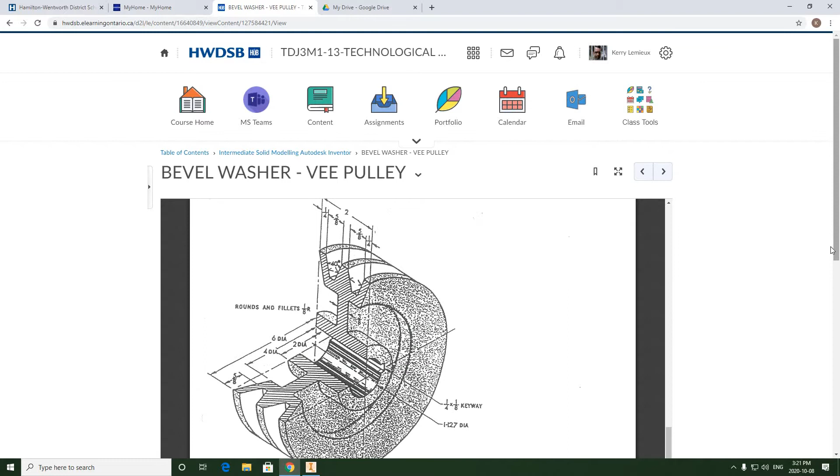So to find the VEE pulley, we need to come down past the bevel washer and we'll find it right here. Now, when we take a look at this, it's a little more complicated than what we've seen, and we can't build it with actual extrusions.

What we need to do is actually use a new feature called REVOLVE, where we're going to create a center line on X, and we're going to be creating a 2D sketch profile of this shape right here with the diagonal lines. After that sketch is constrained, we're going to create a revolve feature, spinning it 360 degrees along the center line axis, and we'll create the wheel.

I also want to mention that these speckles that you see here represent cast texture. So this wheel was most likely cast in a manufacturing process, meaning it was poured into a molten mold, and nothing cast is perfect. So basically, where a cast surface meets another cast surface, that edge can't be perfect.

It has to be curved. It has to be radiused. So that's what this is talking about here. Rounds and fillets are 1/8 R, so wherever a cast surface meets another cast surface, that edge is slightly rounded.

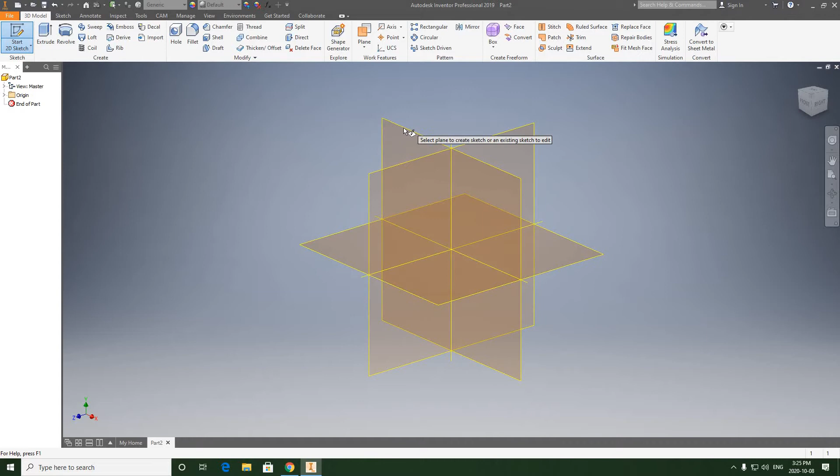We're going to 2D Sketch, and we're making sure that we're selecting the XY plane again. Last time we used the XZ, but I'm back to XY today because this is going to give me a front view start. So to begin, we're going to select line.

We're going to find 0, 0 and draw a line horizontally. It doesn't matter how long this line is. We're not going to constrain its length. So I'm going to right click, left click OK to escape from the line tool. So this line here, we're going to select it and we're going to go up to format and we're going to find center line.

We're going to select center line and that's going to modify that line to be a center line. Now this is very important because if we don't do this, we're not going to be able to revolve the sketch and we're going to have to work harder at also dimensioning it, which also means we're constraining it.

So we're going to hit line, and when we start drawing this, find 0, 0, but don't click. So just raise your mouse up on Y and keep X on 0. And we're going to travel up into about the 600s here. Then we're going to click. Let's zoom out a bit. So now we're going to continue vertically.

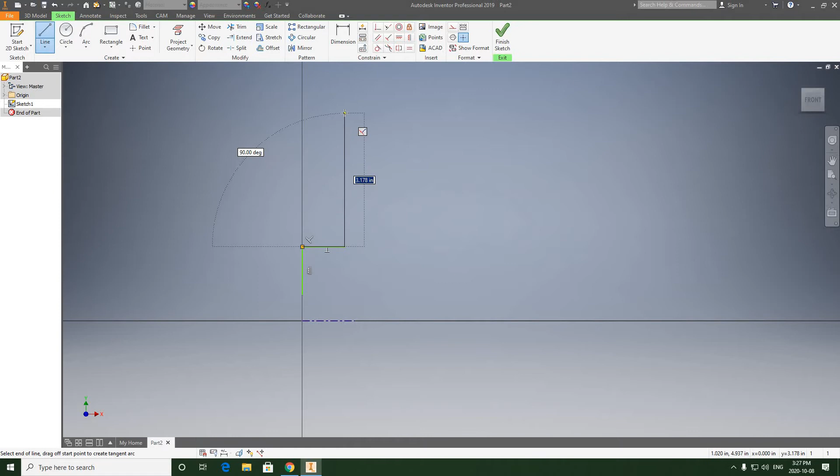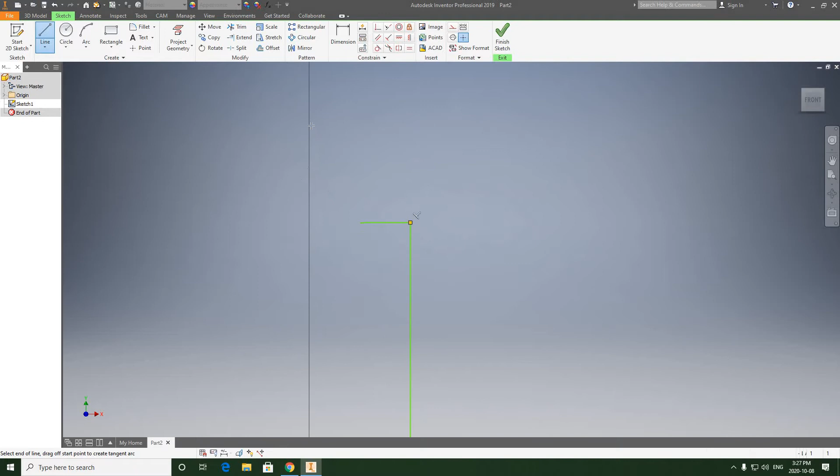And we're going to start to sketch this profile. So this is going to come over horizontally. We're going to come up on an angle. Now, notice when I swing this angular line, when I hit the y-axis, I get this little box that pops up. So that's when I want to click, because I want the top edge of this angular line to be exactly in line with the vertical line on the left side of the hub. So when you see this, click.

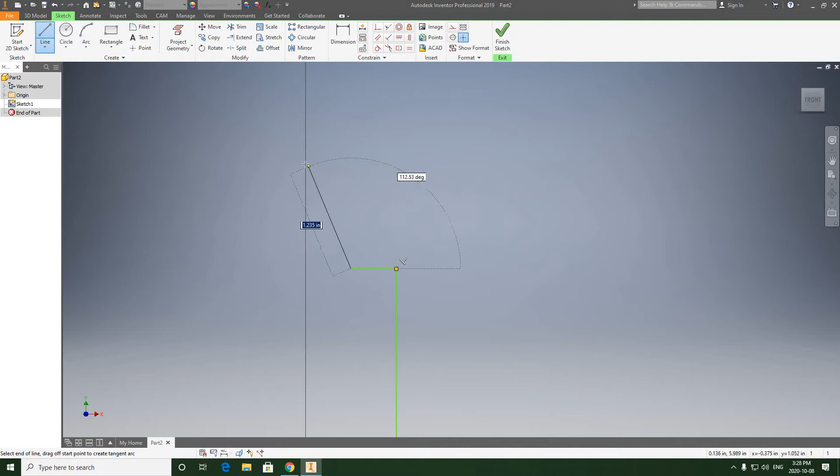And what is that? That is collinear, right? It happens automatically. You don't need to select it from up here. So when I see that, I'm going to left click. And then I'm going to come horizontally in about the 200 range here, 0.200s. Click. Now, watch what happens when I swing this line. This parallel symbol pops up now and again.

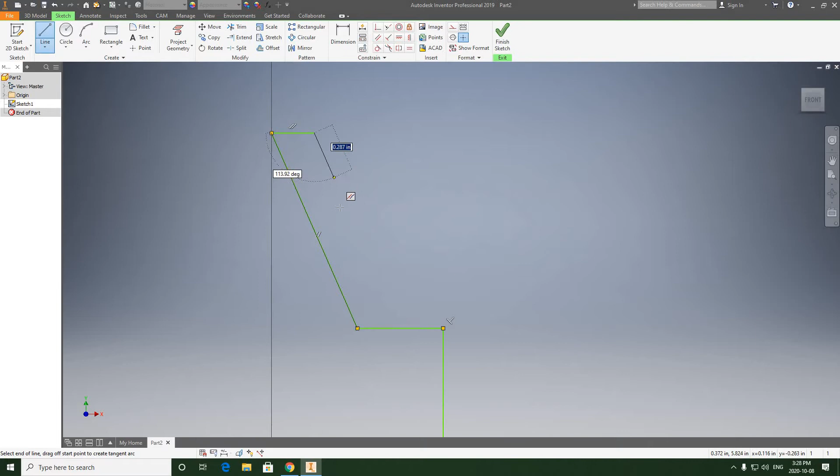And this is important. Even though we're not sketching this to be perfect, we're going to try to take some care in its initial creation. So this line I'm drawing right now needs to be parallel with this angular line I drew. So when you see that parallel symbol pop up, click. And you can see the double parallel symbols here and here, so we know that it's the same. We're going to continue on horizontally, and we're going to be in about the 500 range here, 0.500s.

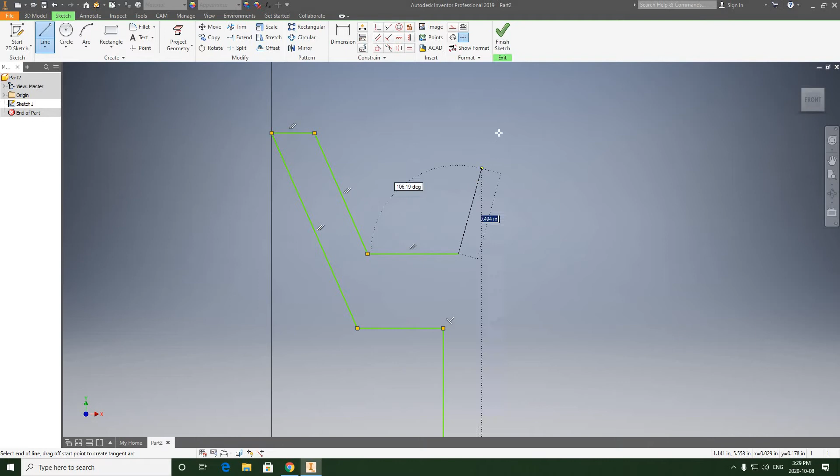We're going to click, come up, and I'm going to pull this line up until that black horizontal line appears, right? Again, that's another collinear constraint. We're adding them as we go. So this is going to make dimensioning easier if we try to make things the same height and make things parallel. So we're going to click. We're going to continue on in the 200s.

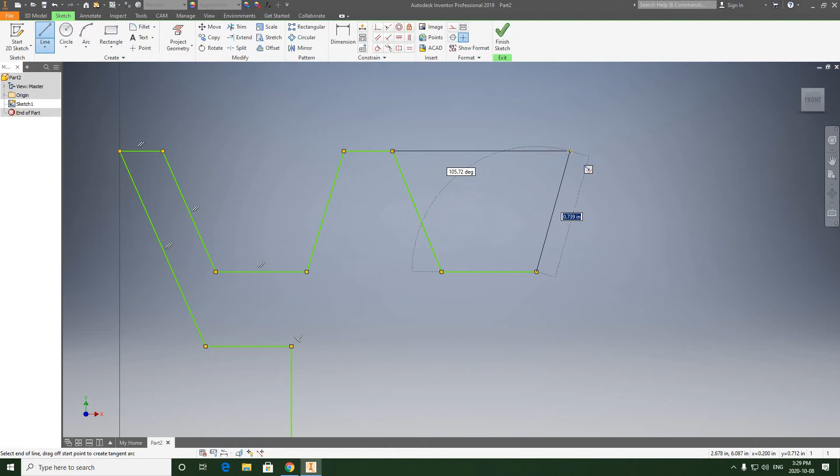We're going to come down and we're going to touch here with our mouse but not click. And we're going to make that collinear. Click. Keep traveling in the 500s. We're going to come up, make this collinear again like we did over here, when you see that black line appear. Come over into the 200s. And again, we're coming down on an angle and we're making this parallel.

I also want to touch here but not click and blend that parallel with that end point to be perpendicular. Right? I'm not clicking that, but I'm just showing you what it is. So we need to get used to using some constraints, but the good news is we don't actually have to pick them. We can just make them happen as we sketch.

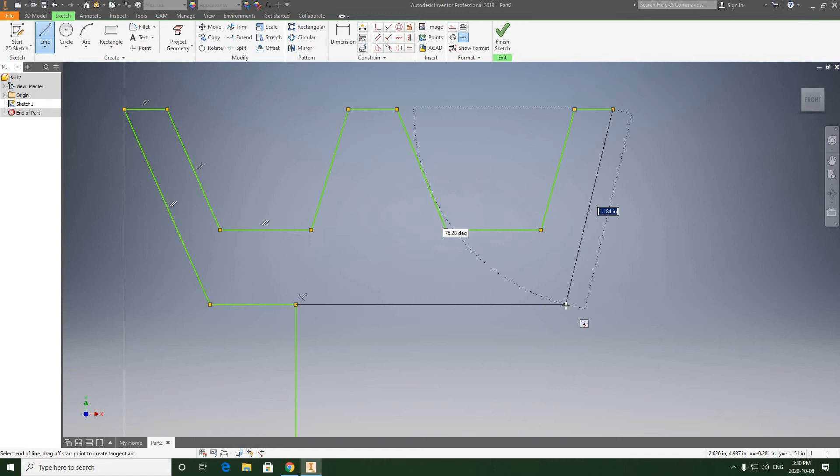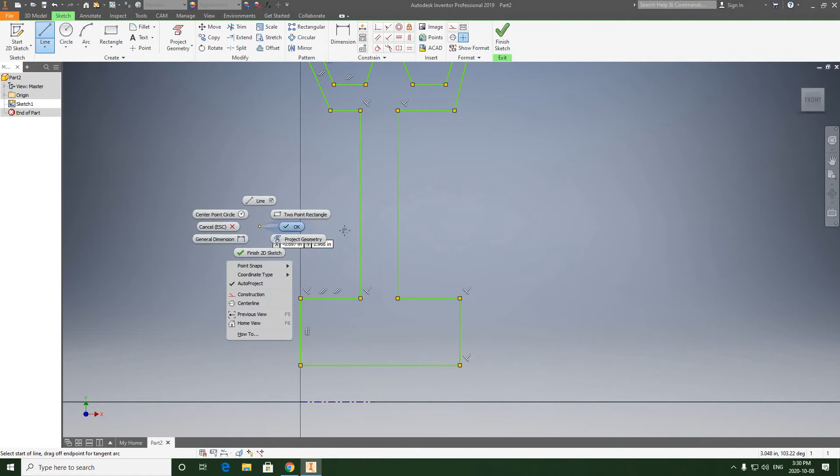We're going to come like this, and we're going to come down. Make that collinear, as you can see. Come out, come down, and then come back to here, where we started. Okay, so we've got our sketch. Now, it's not the most beautiful sketch in the world, as you know, but I did take some care in its creation.

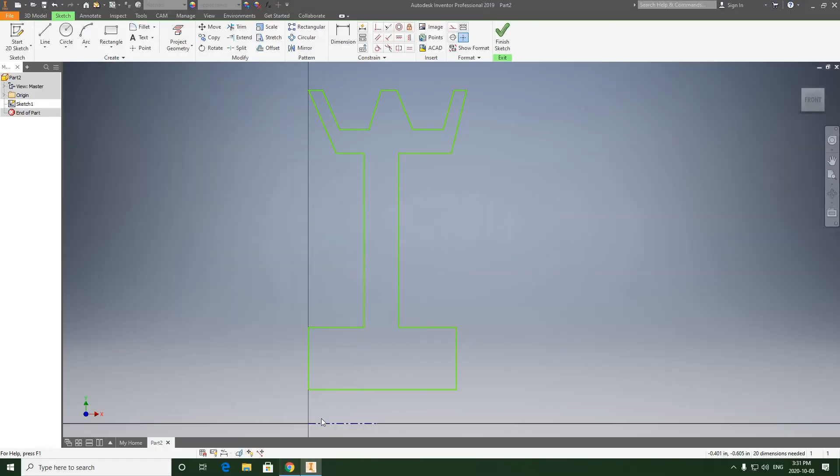And a couple of things that are important here is that the top left-hand corner is completely in line with the left side of the hub. And it's going to be the same on this side, and if it's not, it will be by the time we're finished. If I click into this, you can see that there's a center line running here and here. So that center line is showing that the left face of that hub and the top corner of the V pulley is aligned.

So that's how we know. So again, the width of the hub is also going to be 2 inches, right? Because from the very top, the width is shown as 2 inches from here to here, and the center line aligns the hub, so we know that the hub length is 2 inches as well. So we're going to click back into this.

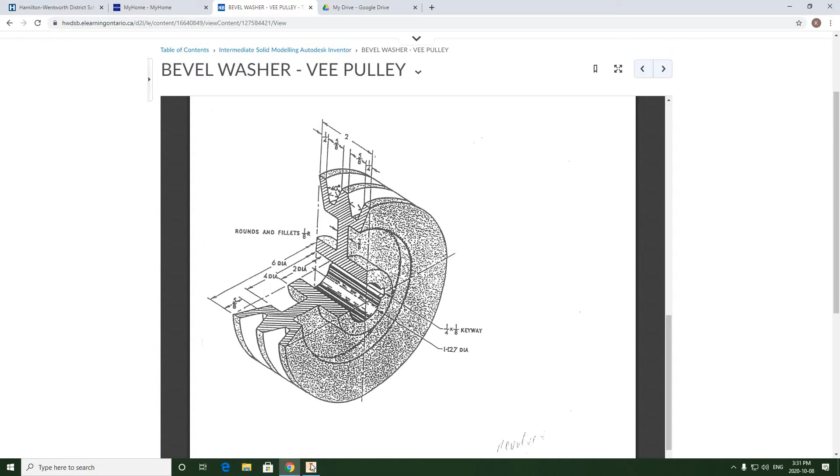Now, before we start constraining anything with our dimensions, it's very important that we lock, or I should say fix, this vertical line to the y-axis. Now, because this is not connected to 0, 0, I started the sketch offset, and the reason I did this is because I want to allow room or space for the bored hole that goes here.

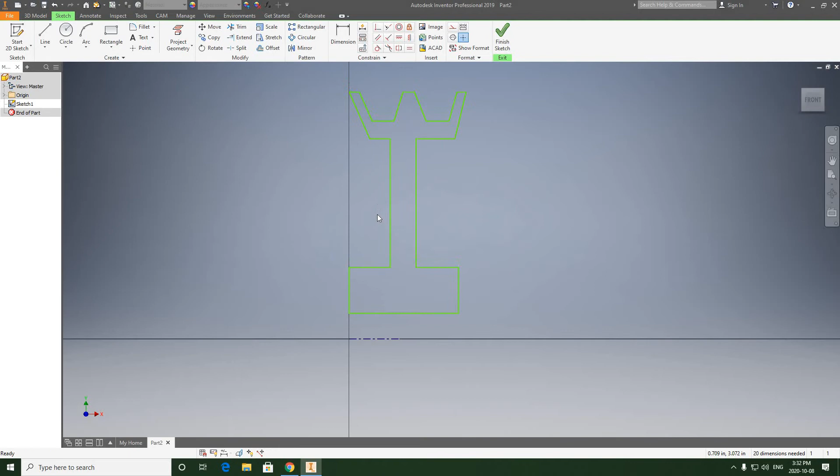So if I start dimensioning this, it's going to be very confusing because it's never going to go purple. I'm never going to get any indication of what I'm constraining and what's not constraining, and that's going to be frustrating. It would be frustrating for me as someone who's experienced, and way more frustrating for you who's learning. So what we have to do is add a manual constraint.

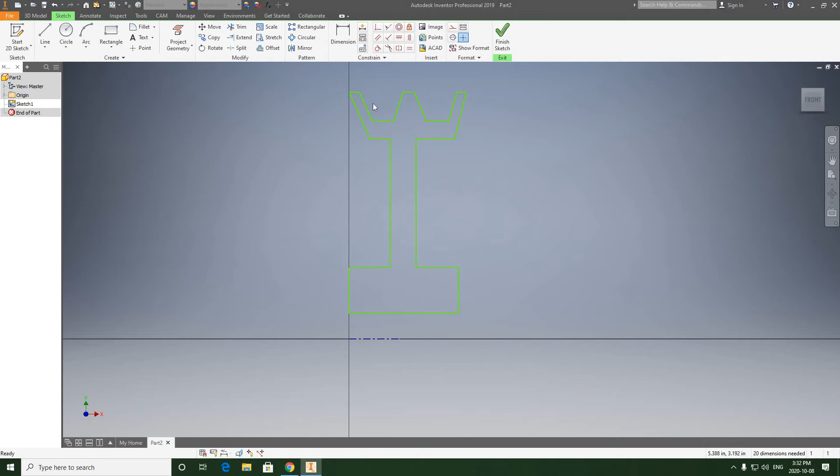We're coming up to constrain, and we're going to select fix, which looks like the padlock. We're going to pick it, and we're just going to select that left line. It's going to show that it's locked. Right? Any sketch connected to 0, 0 will naturally turn purple as it's constrained. The center line is the only thing connected to 0, 0, and whatever is connected on X or Y is always purple no matter what, even though we don't care about the length of it. So you'll see as we go what I mean. So that's now going to constrain as we start to dimension this sketch.

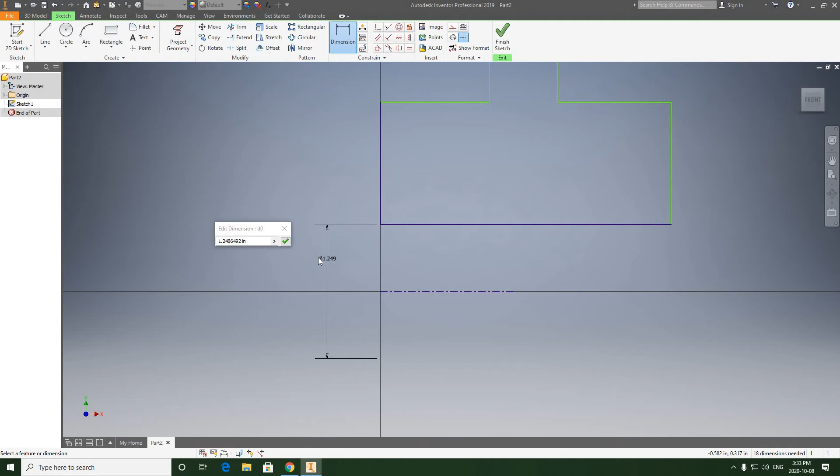So we're going to start with a general dimension. We're going to select the center line and the top of the bored hole, and we're going to pull a dimension out. Now, what do you notice about this dimension? It automatically gives you a diameter symbol, so it knows that it's supposed to be cylindrical, and it dimensions the extension line to the top of the bored hole, and it also dimensions the opposite side to nothing, because the center line is compensating.

So I don't need to divide, because I'm only sketching half of this. I don't need to sketch the other half. The dimensions know, as long as I touch the center line, it's going to run them as their whole size. So I don't need to actually divide them all by 2. Which is pretty handy. So this is 1.127, check mark.

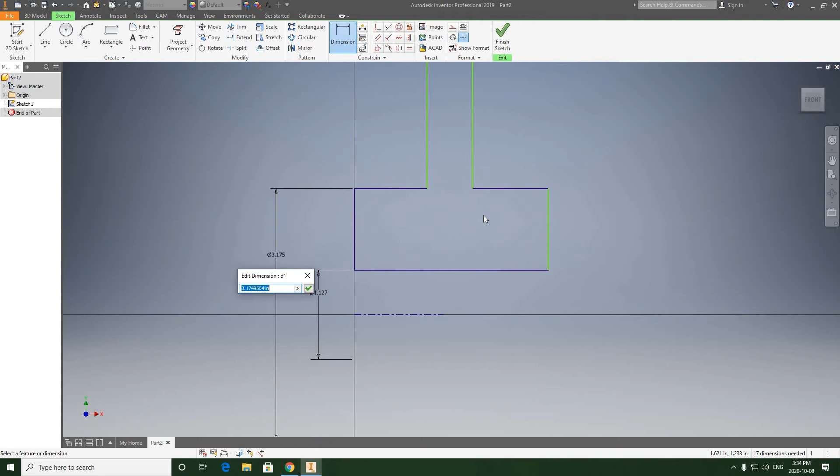Okay, so the next one, from here to here, center line to the top of the hub diameter. And notice how when you draw things collinear, there's less work. I don't need to run the dimension over here to do this side. It knows they're supposed to be the same. That's why you use the collinear constraint as you're drawing this. So this is 4. Check mark.

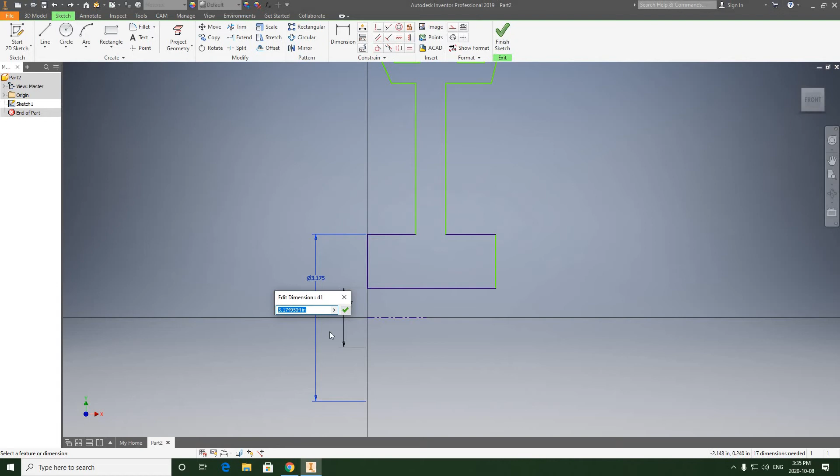Now we're going to work on the length of the hub. We're going to dimension from here to here, and we're going to make this 2, which will solve. Well, you know what? I made a mistake here. I'm sorry. I'm just going to back myself up here. This is supposed to be 2. I apologize. 2. Okay, now this is looking better. From here to here is 2 as well. All right. So the hub is fully constrained.

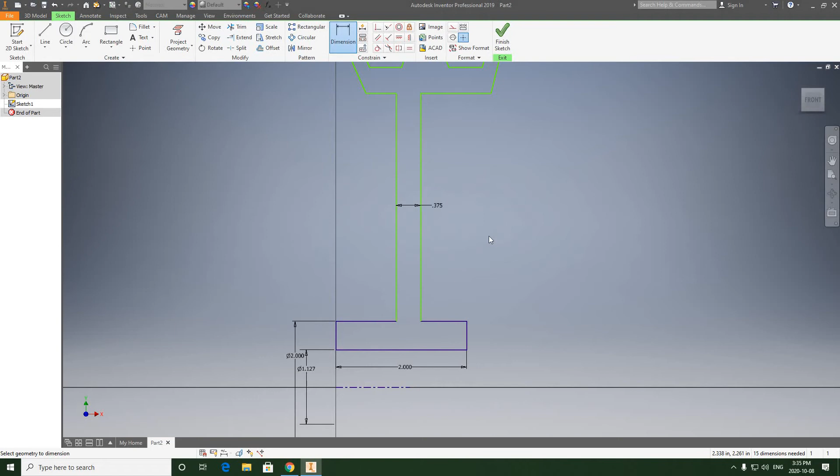Now we're going to work on the stem. It's listed as 3/8. Now, how are we going to center this into the hub? Right? This has to be dead middle. So we're going to run a dimension from the left face of the hub to the left side of the stem. And this is going to constrain it fully, but how do we figure it out?

We know that the width of the hub is 2, so we're going to input a BEDMAS formula into Inventor. So Inventor can do equations, right? Now BEDMAS isn't anything too advanced. It's something that you should all know how to do from intermediate school, I would think. I'm pretty sure they cover this in math, even now as review. So we go Shift 9, we'll start a bracket. We're going to type 2 as our width, and we're going to subtract this stem width, which is 3/8.

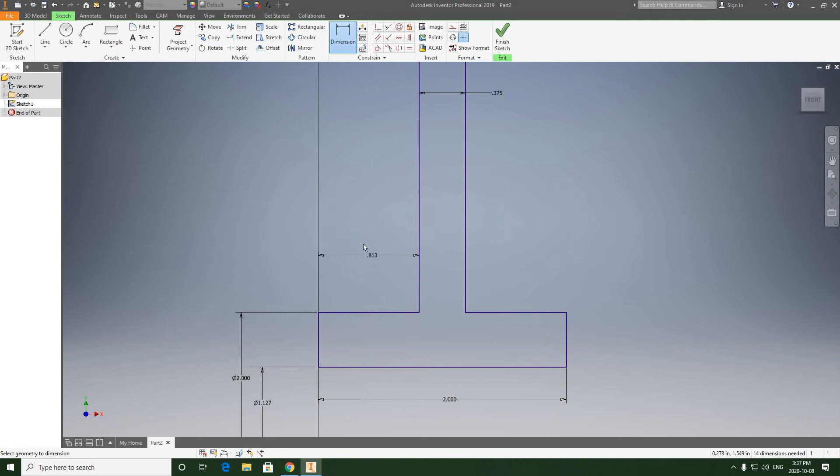So we're going to type 3/8, and then we're going to go Shift 0, which will end the bracket. So we're taking this length, subtracting this width from it, and now what we have left over has to be divided by 2 because we have to divide it over 2 sides of the stem. So it's going to be slash and 2. And we're going to hit check mark. And look what that does. It automatically centers the stem for us and tells us what that value is.

If I was to run the dimension on this side, which I don't need, it lists it as 0.813. If I try to drop that dimension, it gives me a warning, and it says adding this dimension will over-constrain the sketch. Choose accept to create a driven dimension. We don't need to do that because we already have this sketch solved in this bottom half, so we're just going to hit cancel.

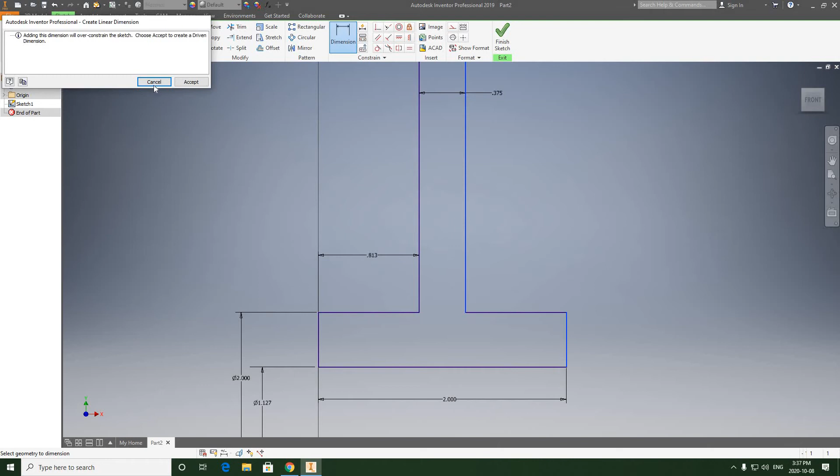So moving on, what do we have to do next? This is going to be the more challenging part to constrain up here. So let's start here. Let's dimension the length of this. This is supposed to be 1/4 inch. This will not turn purple. And the other side is supposed to be 1/4 inch as well. And this will not turn purple. We don't have enough information to fully constrain this yet.

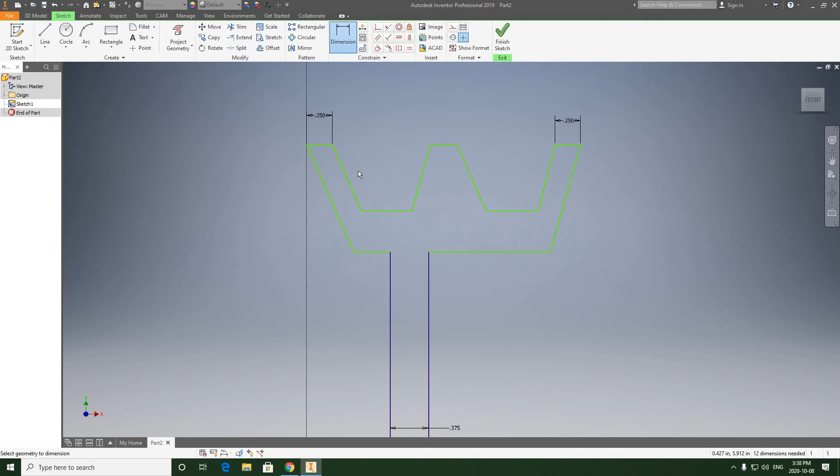So what we can do now is dimension the angle here. Now this is supposed to be 40 degrees included. If I run a dimension from here to here, it's pretty close. It says 39.55. I just can't edit this to be 40 and hit check mark and assume it's correct, because I did not make sure that this was symmetrical. It may look symmetrical to you, but it really is not. So this dimension here, let's right click, left click OK, and we're going to select it and delete it because I can't guarantee it's equal. What we can do is run a dimension this way from here to here.

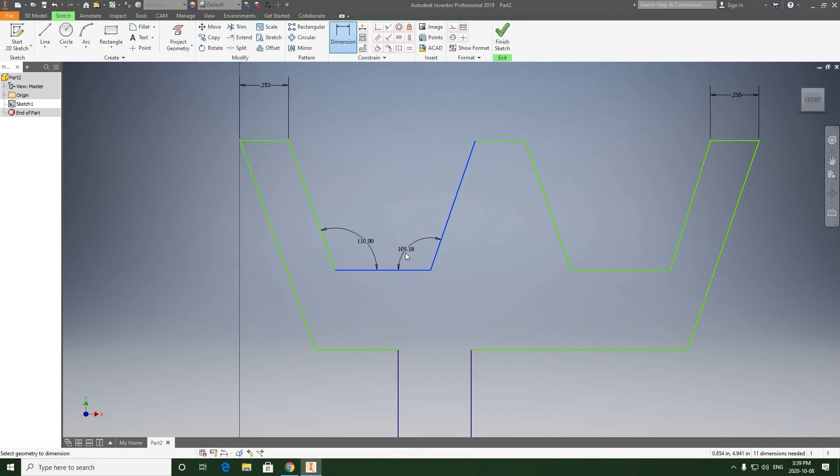And we're going to run this dimension as 110 degrees. And we can run this dimension on the other side. It's pretty close. 110. It's got to be perfect. That's why we have to edit these dimensions. Now, how do I know that that's correct? Well, if I had a line running vertically from here to here and from here to here, I know that angle would be 90 degrees on each side. And remember, I need to add 20 degrees on each side to get the 40. Right? So let's check it.

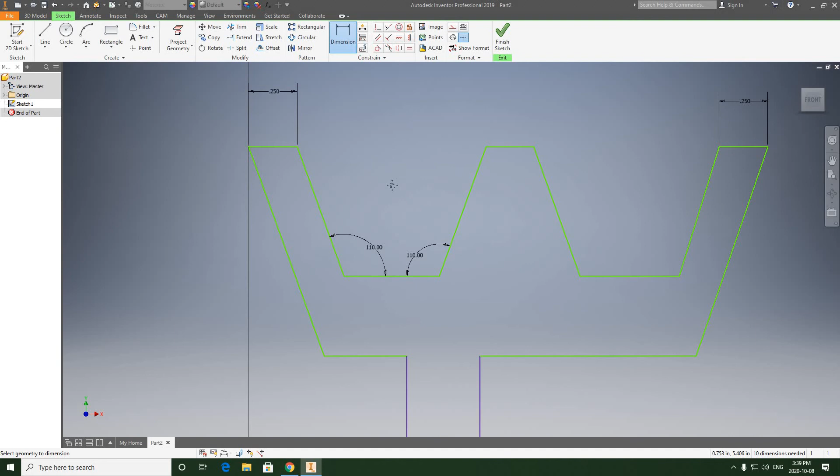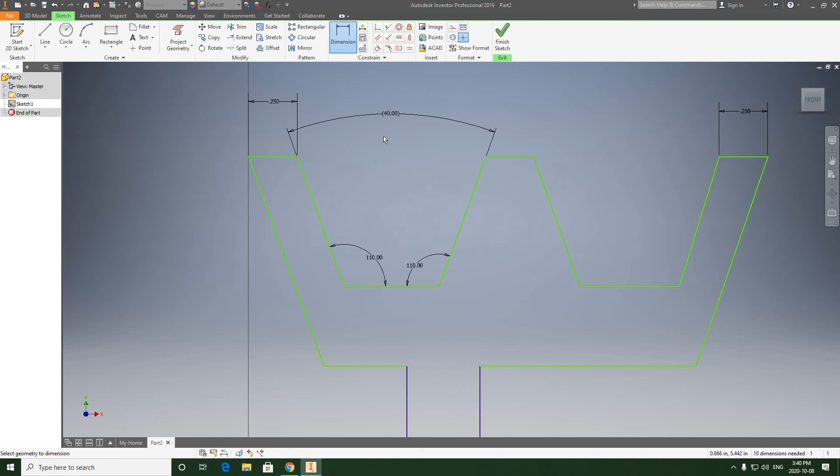So let's run a dimension from here to here, and what do we get? We get 40 degrees exactly, and I know that it's symmetrical because I ran that dimension on both sides. If I drop this dimension, it gives me the same warning about adding a dimension will over-constrain the sketch. So let's choose accept this time. When you choose accept, it just runs the dimension, but it keeps it in brackets. This dimension really doesn't constrain anything, because Inventor knows it doesn't need it. So there's no point in dropping it. I just wanted to show you what would happen if you ran a driven dimension.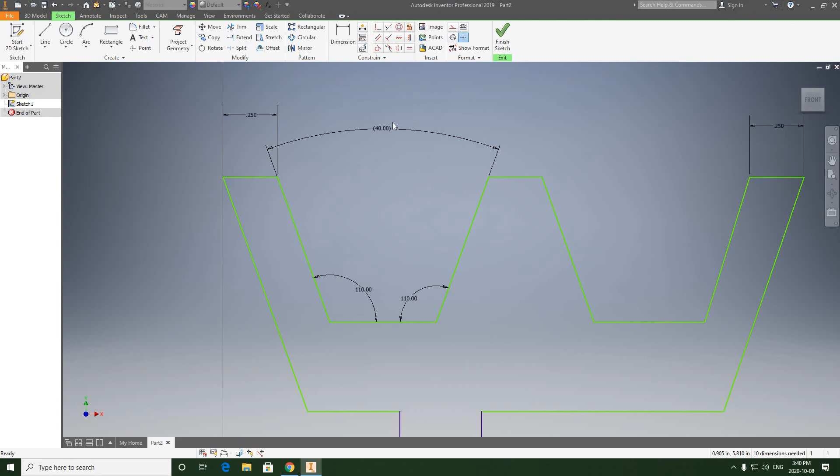So right click, left click OK. Let's select this and hit the delete key. Now, because we made this collinear, hopefully this side will already be 110 degrees, and it's not. So let's check both of these. All right, so we got that one done. We know this is 40 degrees as well. And we also need to set the depth of the V grooves.

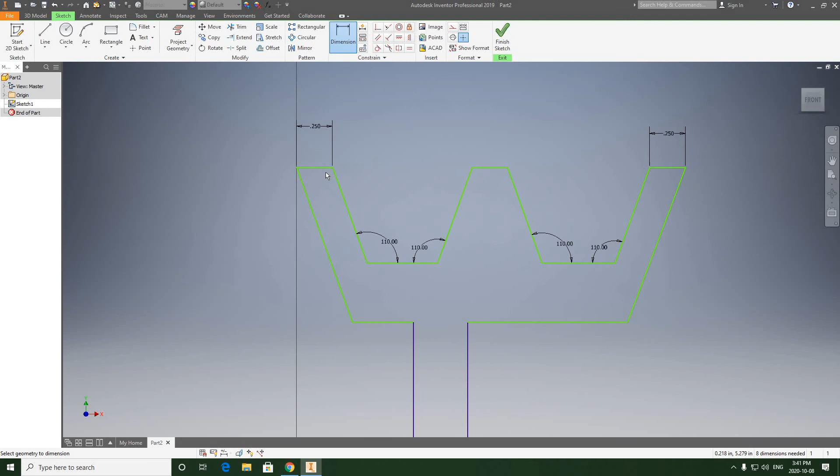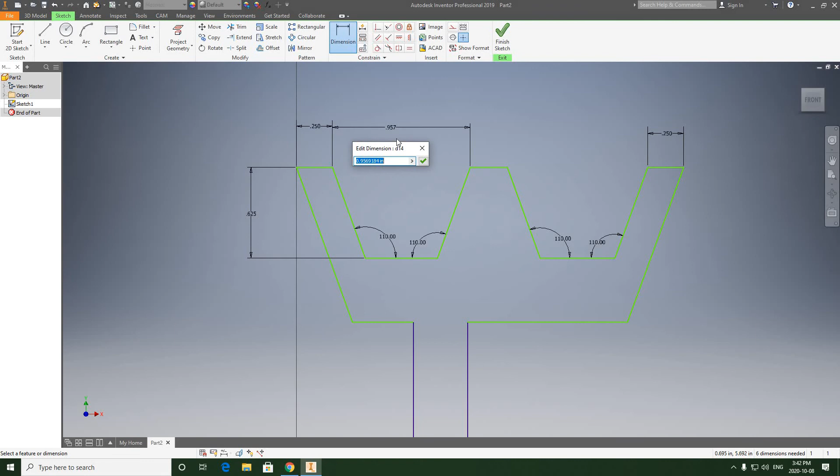Okay, it's counting this as over-dimensioning because I made that collinear when I drew it, so it's associated with this one. I thought these angles were, but I guess I didn't make them collinear, but I made the depth of the groove collinear to this original one, so that's why we're getting this warning. So we're just going to hit cancel. Now we're going to set our width. This needs to be 5/8, and also on this side.

And look what we have here, right? So this line here is going to need to be fixed. So what we can do, the easiest way to fix this, because I know these angles are correct, and I know that this line has to be parallel with this line, we can go up to our Constrain toolbar, pick parallel, select this line and this line, and it's going to force this line to be parallel with this one. So if that problem comes up, that is your solution right there.

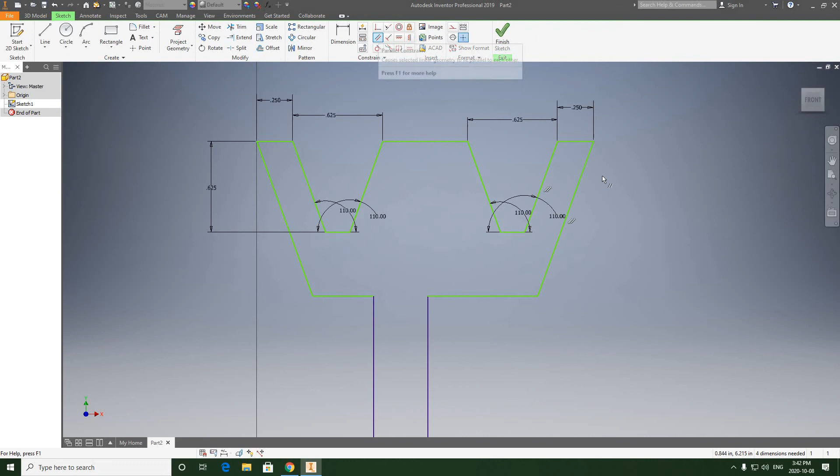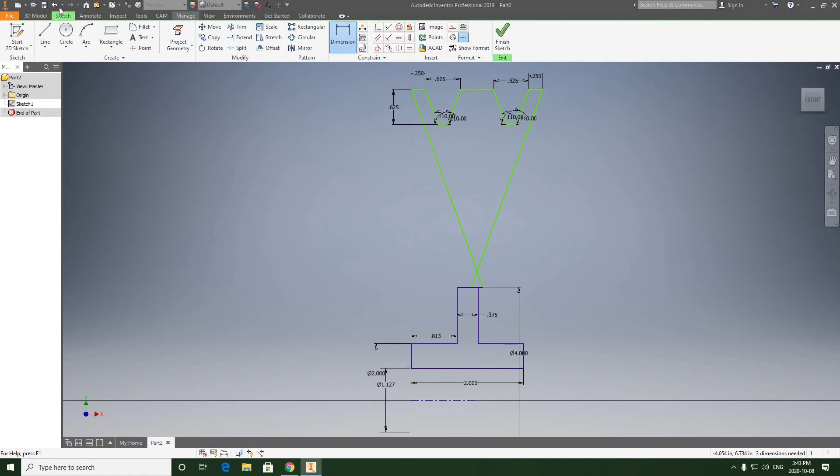All right, moving forward, we have to set the diameter of the top of this. So we're going to go dimension from here to the center line. So this is going to be 4 inches. All right, and look what happens when we do that. This thing pops down like this. So this is kind of confusing. So what we're going to do is undo this dimension right here, and we're going to run a dimension from here, and we're going to make this one 6, and look what happens.

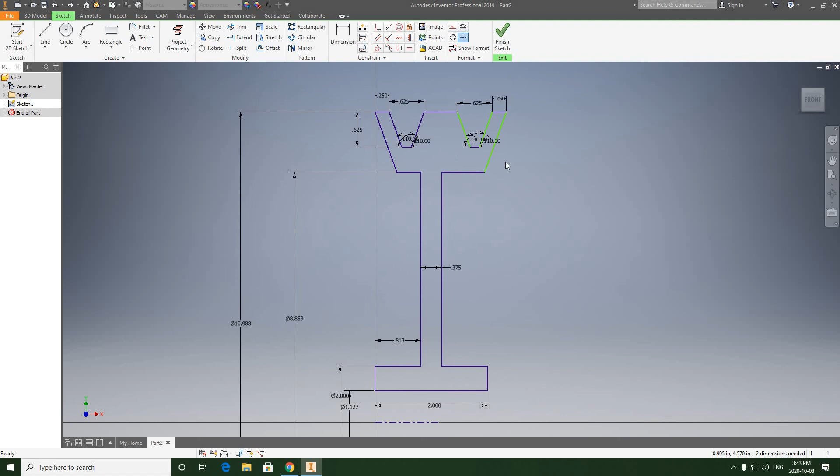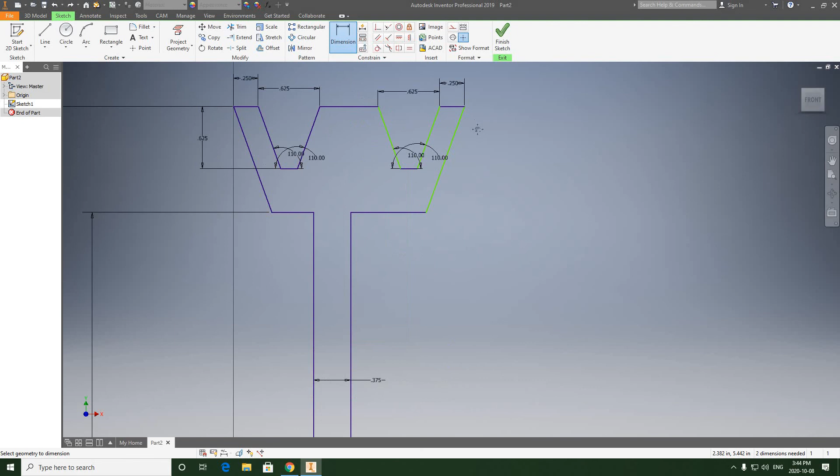So the first thing I would recommend is centering this, right? We know that the top left-hand corner is already aligned with the left side of the hub. We know this side is not. So we're going to center this. So we're going to go dimension. We're going to do this the same way we did the stem to the hub. We're going to go stem to the top right of the wheel. So we're going to run a dimension from here, and we're going to put the same formula in.

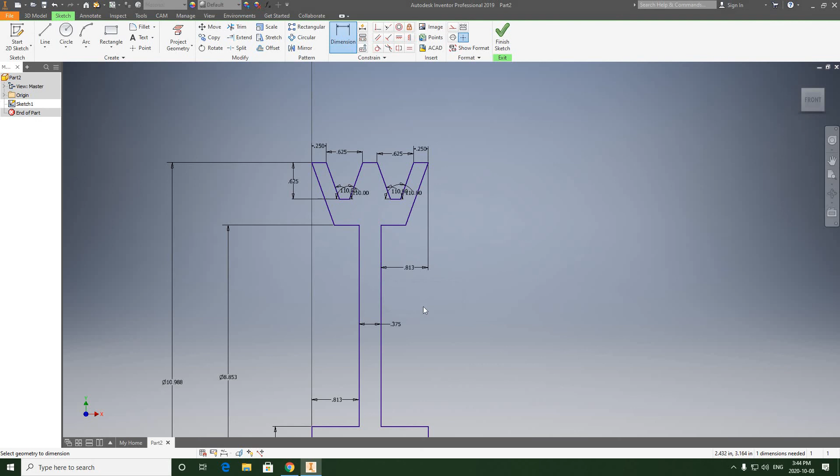We're going to go bracket 2 as our length. We're going to subtract the stem, which is 3/8, because it's dimension to the stem to here, and we're going to go divided by 2. All right, so that's going to center it. So all we have left to do now is fix these 2 dimensions. So we're going to run this dimension here as 4, and this one here as 6. And that fixes it.

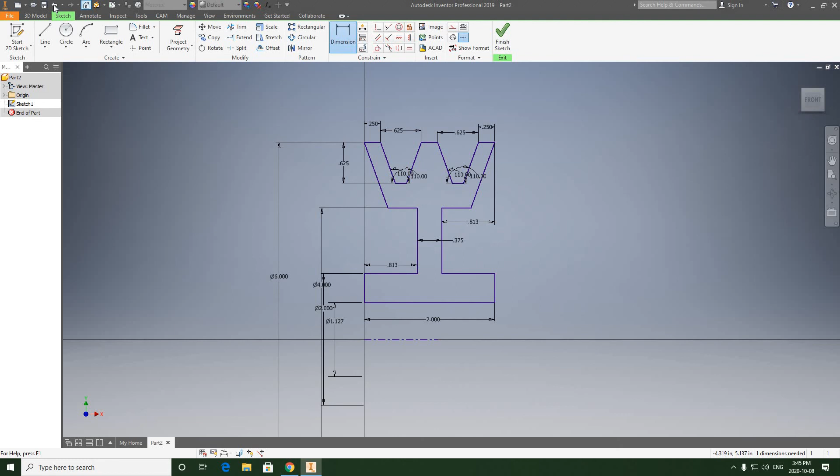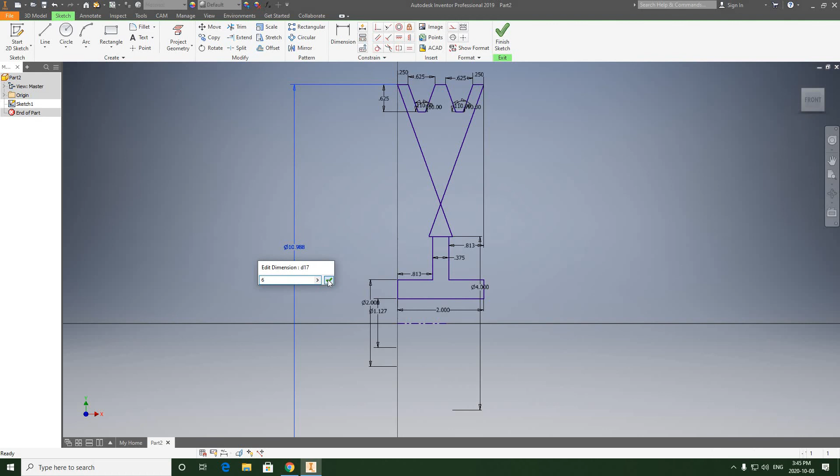So now everything is constrained, right? It was purple before, but I hadn't edited these dimensions yet, right? All the dimensions have to match what is seen on this image right here. So again, let's do this one first because it's the smaller one. Edit this one to be 4, again, which pulls that down, but making this one 6 basically balances it out the way it needs to be.

Right? Yours may or may not behave like this. When you sketch yours, everyone's is going to be a little different on the way to getting the sketch constrained, but as long as you're ending up with the result that looks like this, that's all that matters. So it may take you 1 attempt, 2 attempts, or maybe even 3 attempts to get this to work. And if you're having trouble with this, you need to let me know, and I will assist you.

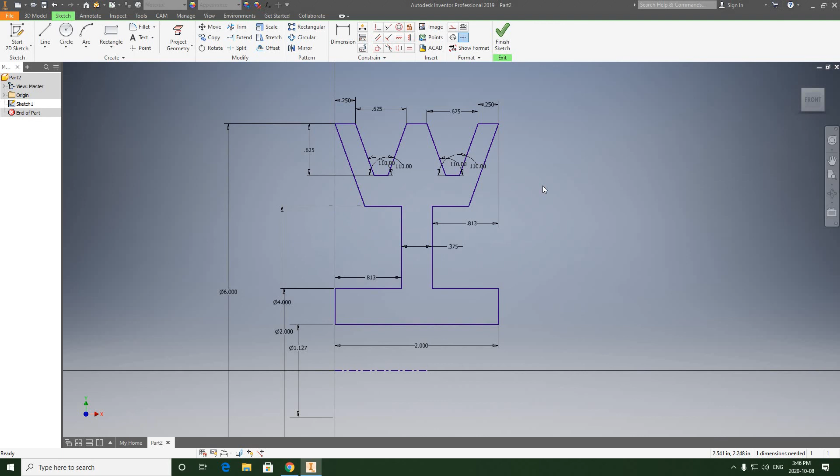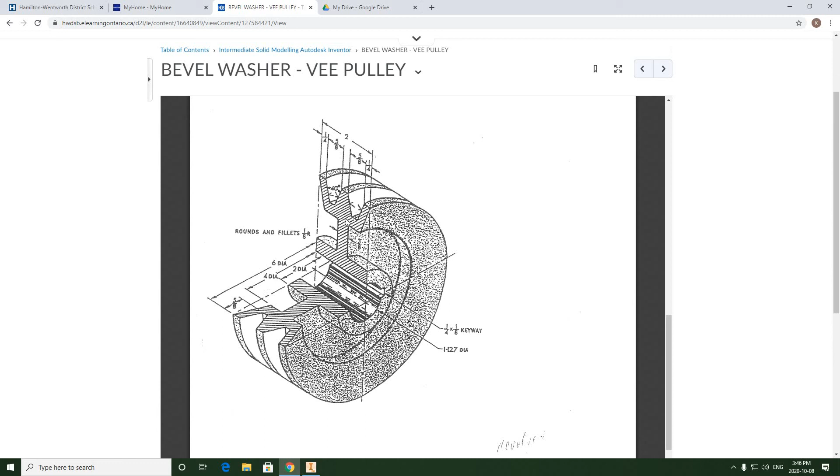So hit Finish Sketch, and all we have to do now is hit the Revolve feature, and it spins it around, gives us a preview. So it's spun it 360 degrees along that center line, and we're going to hit OK. And there is our wheel. Now, one thing we're not going to do to this, so do not do this, is cut a quarter of this away, like you see here. Right? The only reason it's done here is to allow you to view the sketch profile. So we're keeping ours completely round.

So at this time, I'm going to save it. VEE pulley, put it on my desktop, and that is how you sketch, constrain, and revolve that VEE pulley. So the sketch is a challenge to constrain, but follow my video and you shouldn't have any trouble. And again, if you have any trouble, you need to get in touch with me and we need to figure out what the problem is.